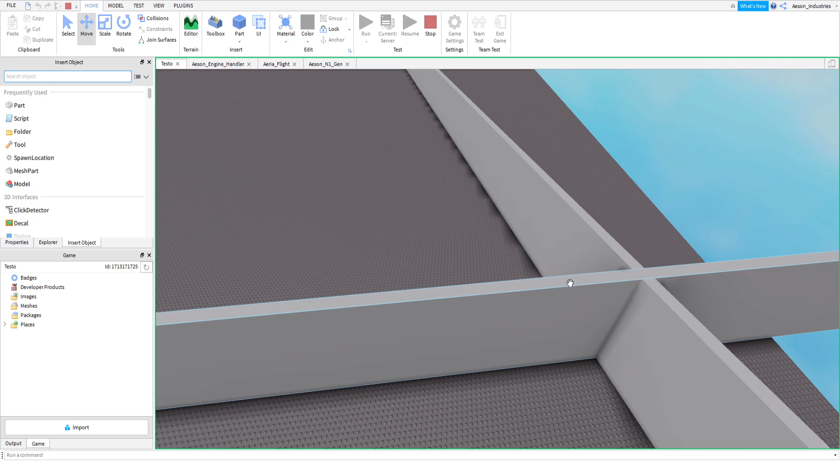Depending on the speed I'm going at, if I find out that it's easier for me to do the 777X before the A320, then I may just skip the A320 and come back to it afterwards. But the A321 will definitely come out first. Then, depending on how fast we've done the A321, I could even just have out the A320 as well. Then move straight to the 777.

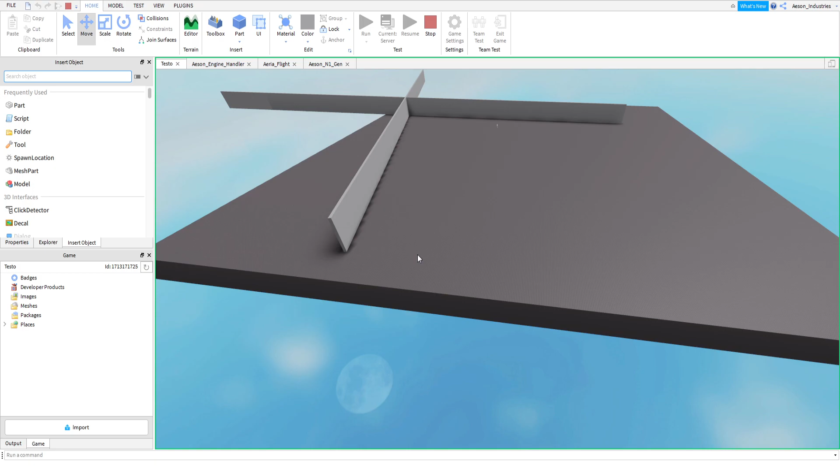And that's the 777 would just take maybe a small bit of time because it's a different system. Airbus systems, as I say, use fly-by-wire. The 777 does use fly-by-wire, but its fly-by-wire works, for me, kind of stupidly if I could say. It's a bit different, and what it does, instead of holding your flight path as I've demoed in multiple videos now, it instead holds speed.

So the last speed, I believe - I will need to still do my study and research on it, my homework on that - but what it does is it's a speed hold type of fly-by-wire. So the last speed you were doing before, like you moved the yoke, before you release the yoke - say if you were flying, moving the yoke up and down, and you release the yoke, just before you release it whatever speed that is, if it's 250 knots, I believe the plane will hold that speed. It will pitch the plane up automatically or pitch it down automatically just to maintain that speed.

Which means on the American plane, majority of the time, the only way to really gain altitude is to use the thrust levers. And I remember, their autopilot also has a completely different input, called FLCH or something, flight level change hold, which basically, because the flight is a speed hold fly-by-wire, it needs to both maintain the speed you set when climbing to another altitude, and also maintain that altitude at the same time.

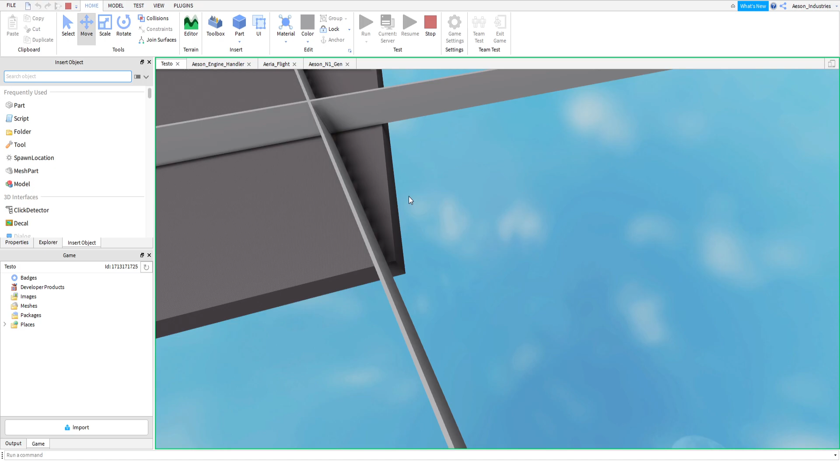When I move to Germany, there are possible job opportunities in different technology firms in the real world, as well as, if I take up this Airbus opportunity, that will mean less time anyway. So the future of Aeson is definitely bright, at least for aviation.

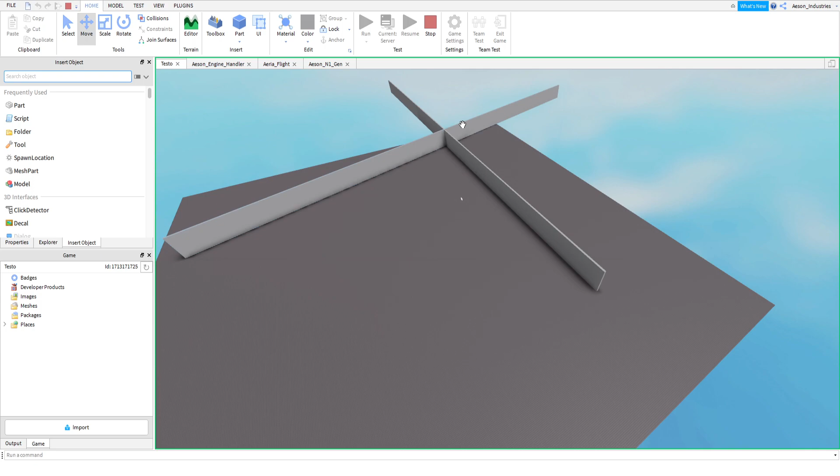We will definitely have a lot of great systems out by that time, so there's nothing to worry about. And then road trains, of course, for those train fans, there's a bright future there too. By the time Aeson basically closes, we would have accomplished all we set out to do, and even more. It'll be a great chapter to close.

Now, I don't believe the group will be removed when we end development, the Discord probably won't be removed, so there'll possibly still be support and stuff. But when Aeson does come to its end, it'll be a development end, that type of thing. That's not till, at least for now, a pretty long foreseeable future.

We can't wait to get to the stage where Roblox brings out grids, so we can have 8-hour flights - joke - but also brings more physics improvements, stuff not breaking, and better experiences for the community. As I say to those in the community, if you have a dream or a focus on something, don't worry about what's going on in the community.

There is, in every community, toxicness or whatever, but if you're focused and aiming to do something, you don't ever see that, or at least don't come across it commonly. Aeson has barely ever been in any toxic beef, at least any big beef. I barely even know what goes on with drama in the aviation community unless it ends up in the server because someone's talking about it, since I just don't bother.

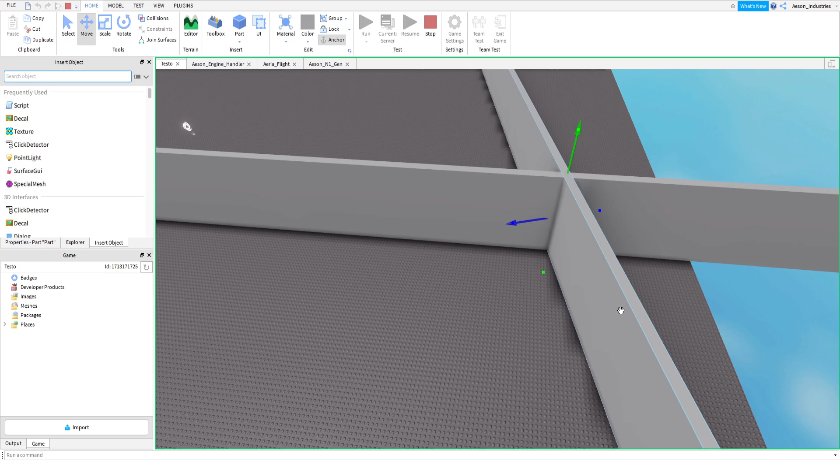I would say our community is not completely as bad as some people may see it. If you've ever been in Road Cars, Road Military, or Road Nations, I think you'd be completely shocked if you saw those.

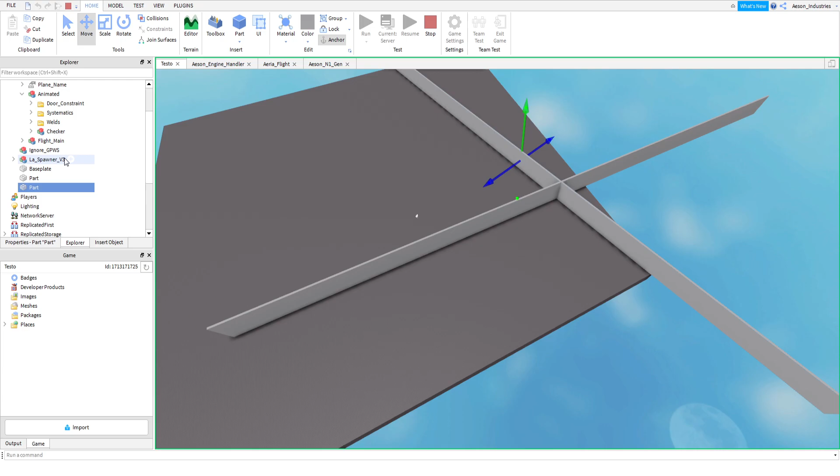But there's no need for anyone to be focusing on the negative side of things. It's not worth your energy, and if you feel that's what you're going to spend most of your time on in the community, it's probably best to just take a break from it.

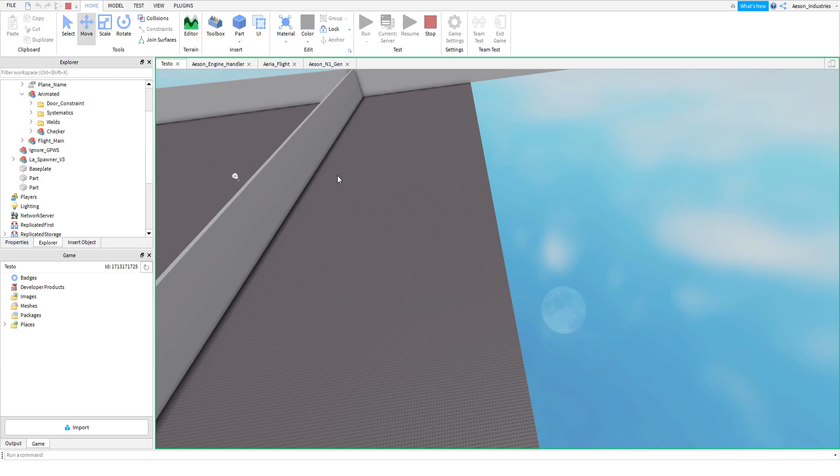Of course, I know there are people that do get this, maybe just because of people being jealous of them, etc. My aim is just put your head down and ignore those people.

Try and make sure that if they're exploiting your game or something, you don't have vulnerabilities in it. Most people do have vulnerabilities, as I say there was an exploit about throwing things about. Make sure stuff that isn't used is anchored or deleted - so cars, if they're not being used by someone inside them that's frozen, delete that car.

Make sure all your cars, planes, or systems, if there's no owner in it, set the owner to the network owner to server. No one can exploit that thing once it's done like that.

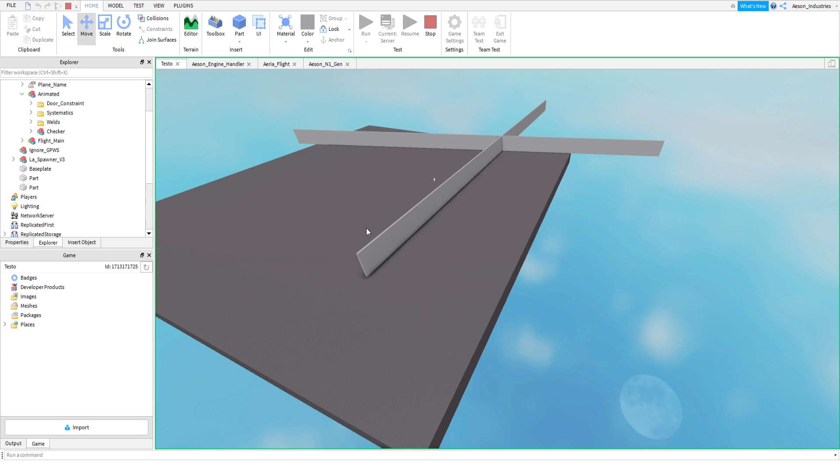If you have an Aeson jetway, use its function of freezing itself by making sure that if you start the game for the first time, jump into the jetway to turn it on, then jump out of the jetway if you're not using it, and it will freeze itself. No one can fling a jetway. I haven't seen jetways being flung after people realize this.

Whatever is unanchored in your place is a risk of exploiters using the network ownership radius exploit and throwing things about. So try and avoid that.

The one thing I would ask the community is just not to be lazy too much. Try to value the developers in your community. Growth doesn't come from being lazy or undervaluing your developers. Working together is very important.

It wasn't long ago until we started using mesh planes. The community's been here maybe 9-10 years. I remember when I joined in 2013, we had row air and stuff, and that was when CM32 kit was just pretty new, and we've been using that ever since, even though there's been new technology until recent.

So now trying to bring in my new kit, it's more of a challenge that will easily become mainstream by next year at the latest. There'll be more Aeson kit types in the community, by other people probably, or if not, my Aeson kits should be around more pilots.

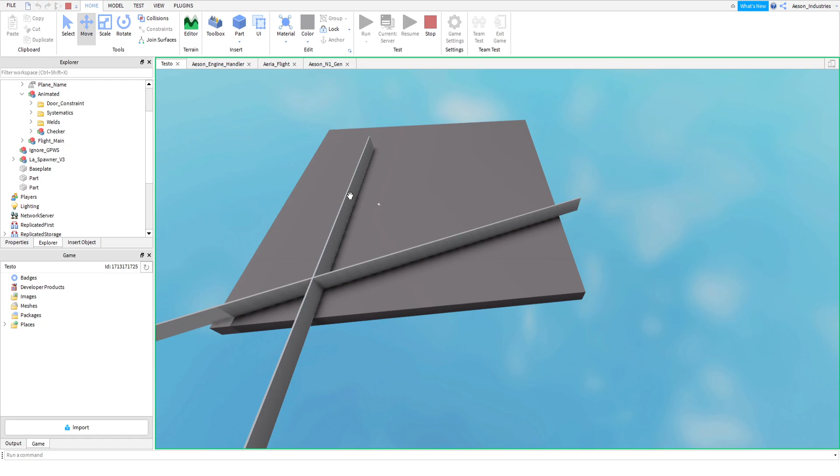When I started Aeson, there wasn't really any mesh planes being flown by anyone, so it was a big gamble on how to get this to be mainstream. There was a bigger group at the time who were also looking to bring mesh, and they'd been there for quite a while, but they didn't do as much at the time.

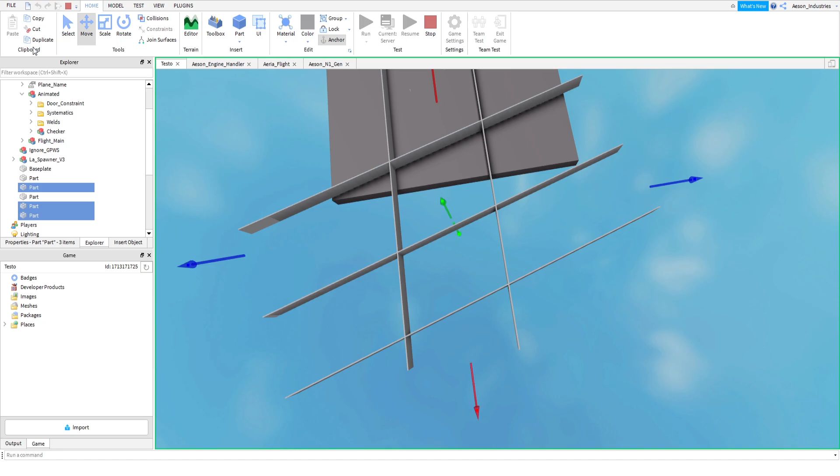So I decided to start off with a plane that wasn't commonly used, because the A350 at the time wasn't a commonly used plane. In fact, I don't think I ever saw an A350 on anyone's airline at that time. The first airline I flew with after coming back to aviation was Air Britain, but they were using mainly 767 and A320, so I didn't really see that there.

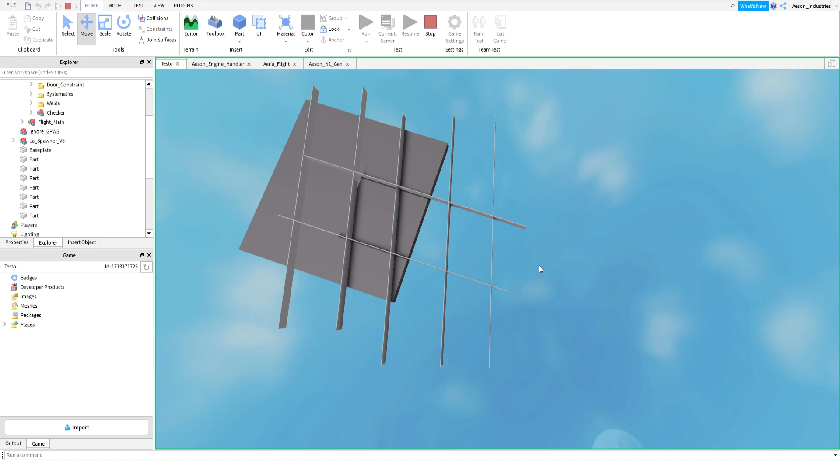So I decided I'm gonna start with the A350. Not only is it my favorite plane, but it'd be nice to have it in Roblox. And it went off with a decent bang, and then we moved on with that.

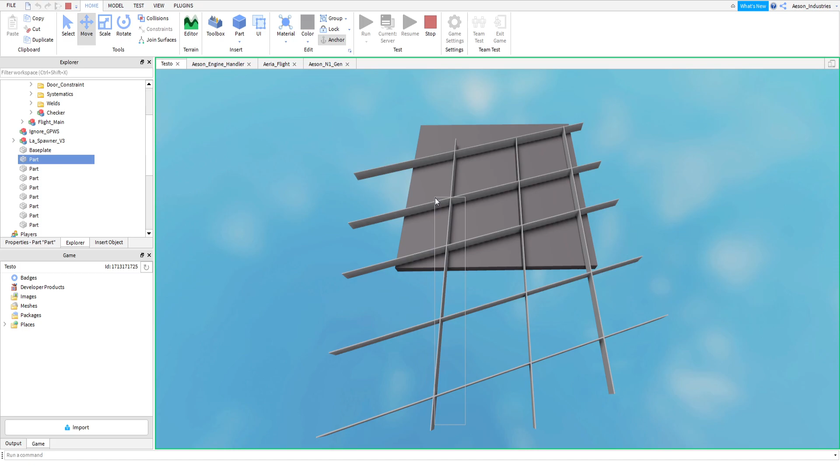I decided not only to make it a nice mesh, but to bring some systems I hadn't seen people do but should have been done - suspension, the first fully working suspension, some nice sounds. At the time I don't think there was a kit with adjustable flare. I may be wrong, but when V1 came out I wasn't aware of one.

This was around 2018, around September. If you knew of one at that time, let me know in the comments. But yeah, there wasn't one at the time I knew of, so we added that, and it did really good wonders.

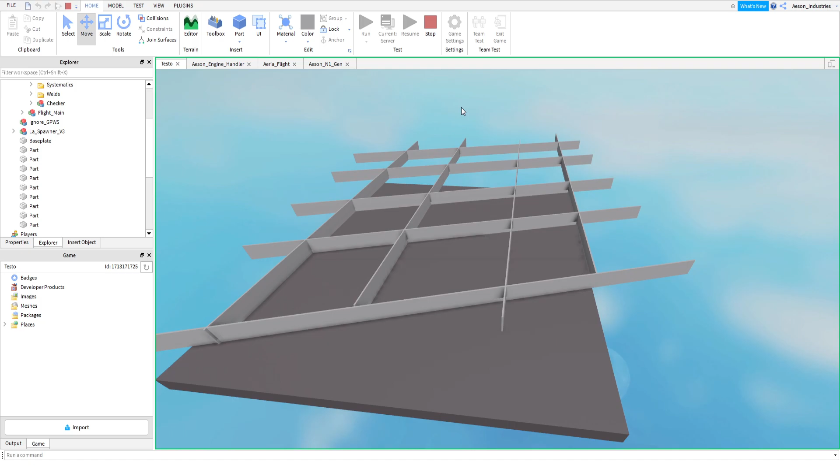The airline that really showed off the A350, for example, was Fly Swiss, and also Skyfly were flying it. We had Aeria also flying about the plane.

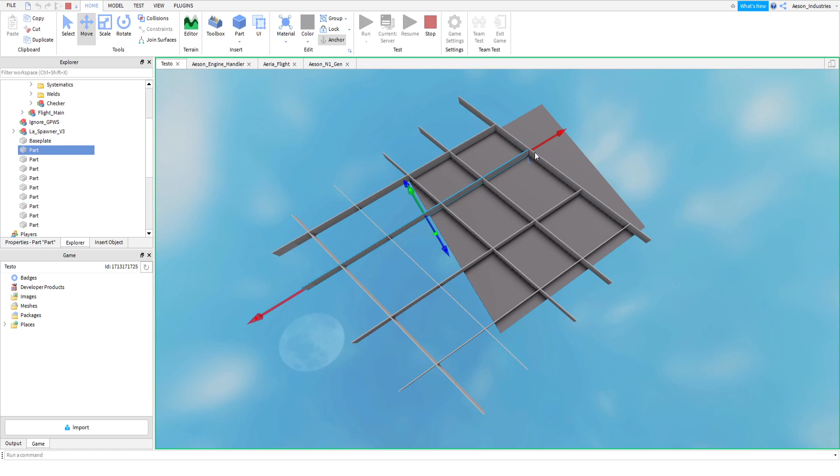More and more people were coming out with planes, and so we look to a new 2020 where quite a few airlines now are just readying up themselves to start flying the A350 again, with Air Monaco looking at starting their A350s again. Aeria is just waiting on their interior for their new planes.

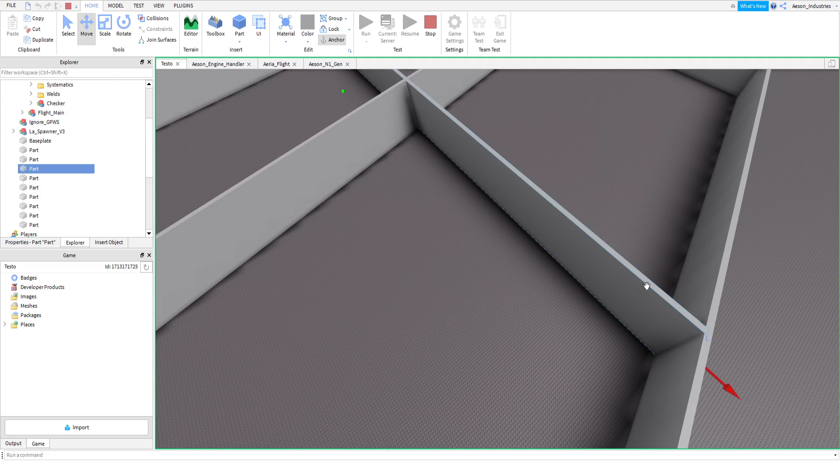We have, I think Spectre was talking about the A350. Fly Swiss is looking at a new interior for their A350 at the moment. Quite a few airlines are looking for new interiors, so I can't wait to fly with those.

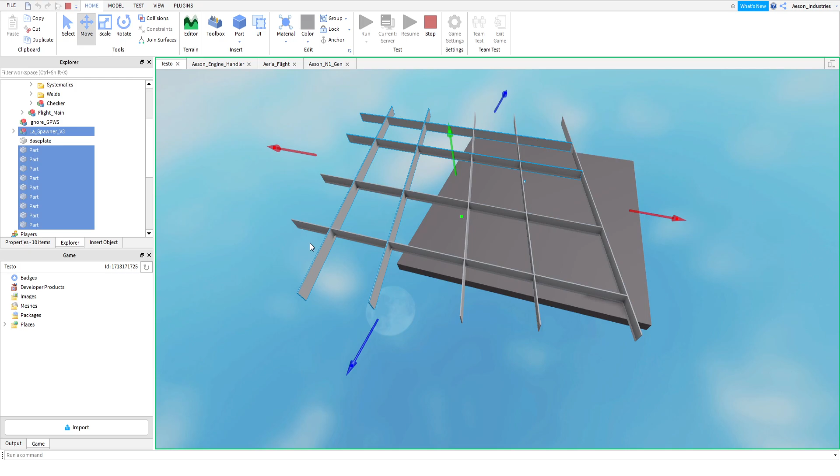It's always nice, as I say, the money's not much, it's not the focus. It's really to just see if you've had an impact on the community, however small, and if it's inspired people to get out of their comfort zone and try something new. If you've done that, you're doing something right. If not, you've got a lot of work to do, I guess. But yeah, the aim is, as I say, and I've kind of done this without my

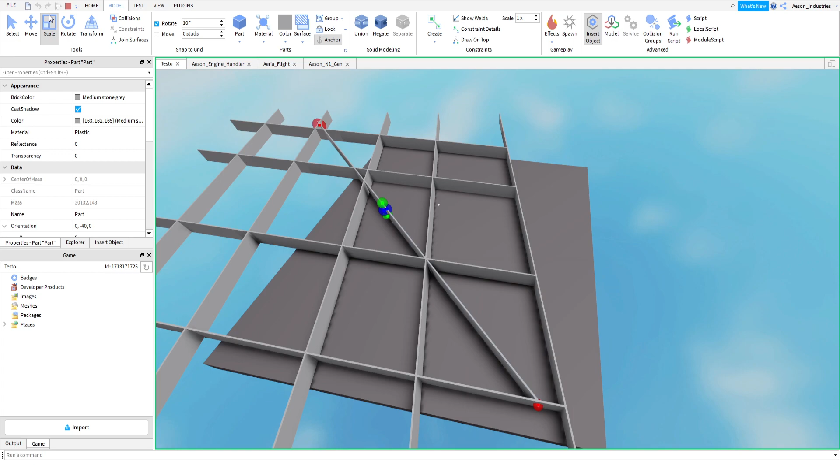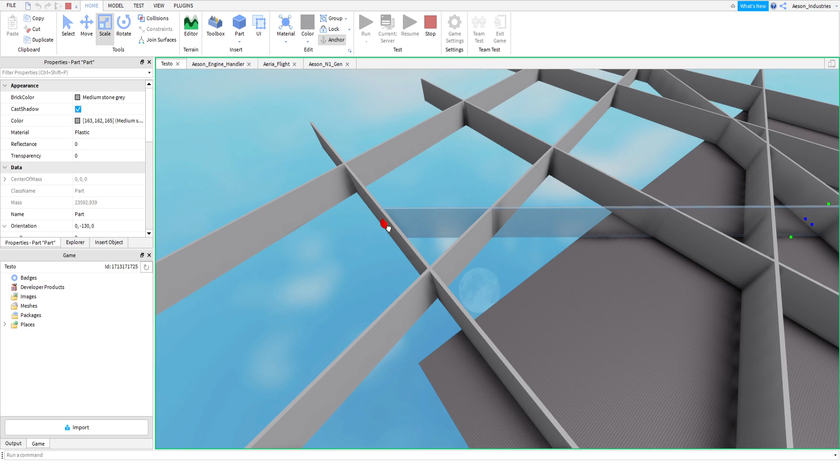I would definitely love to have more developers working on the Aeson stuff. Yeah, for sure, it would probably make things faster. But on the flip side, all the systems I do just come out of, like, literally once I finish a day, I go to bed, and...

If I'm trying to think of something new I want to do, like when I was thinking about this kit, it all came really from a dream. I'd just be thinking, oh, this is what I do, and I can see the code in my head and see the method to do it.

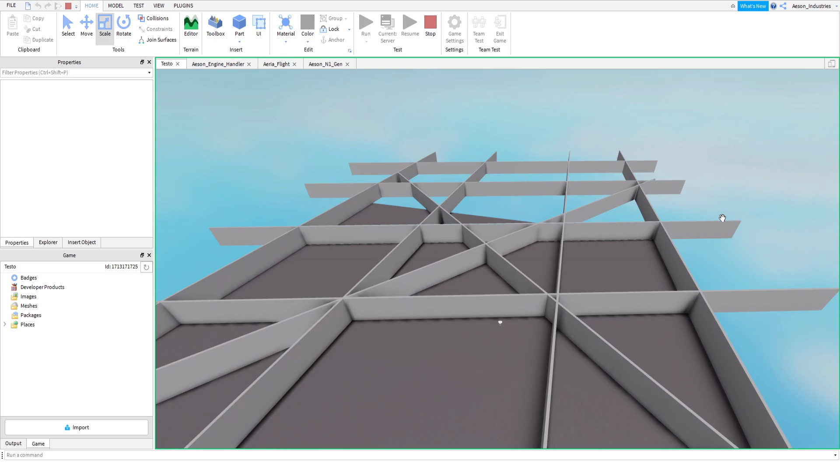If I have a problem I can't find a solution for, like the previous issue with the A350 where we couldn't land properly because it was Dutch rolling, the solution I found was pretty much in my head: you need some type of system that will keep the plane's rudder correct during any differential movement, because the ailerons create their own adverse yaw from how they move, so you need to counter this.

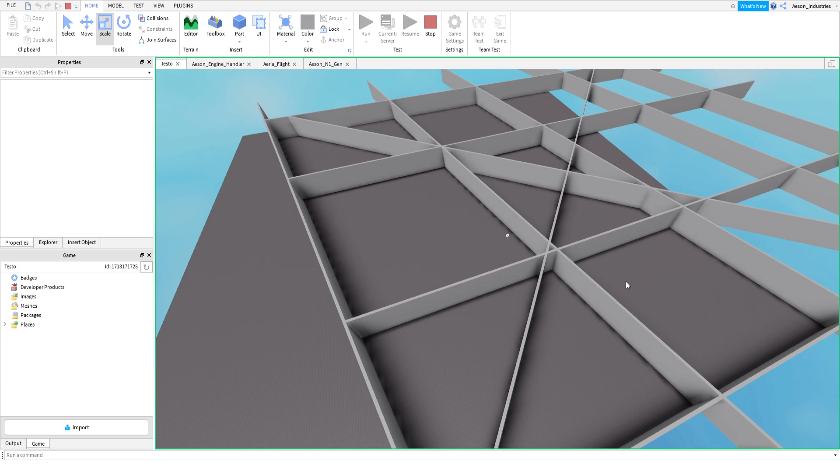I looked online for what that is, saw a yaw damper system is what's used on all planes, and I'm like, oh okay. Coded that up quickly because it's just PID, very easy for me to know what to do there, and boom, fixed the thing. I see all my students now having no problem landing, at least following the center line.

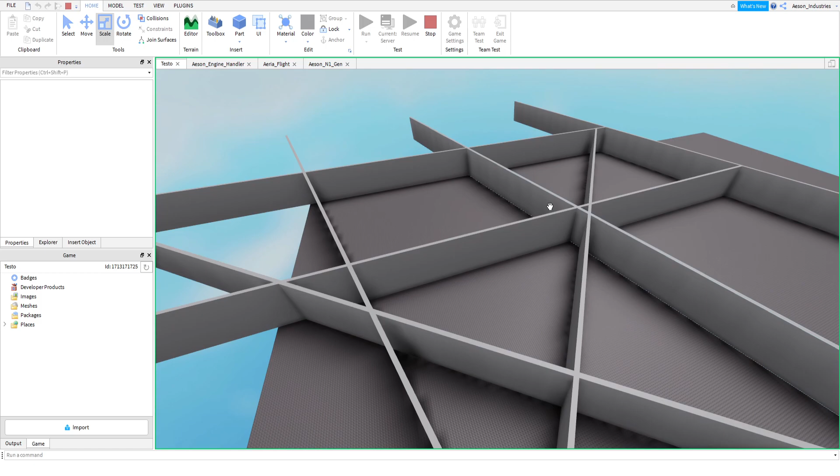We'll talk about landing in a different story, but yeah, much better than before. The others are like, damn, this is a lot more stable now, because if you've flown the previous versions before these updates, you'd probably be like, how does anyone fly this? Funny enough, the V2 planes were actually being flown for a brief while by a few airlines, Fly Checkways, Fly Aeson, and I'm surprised how they were flying.

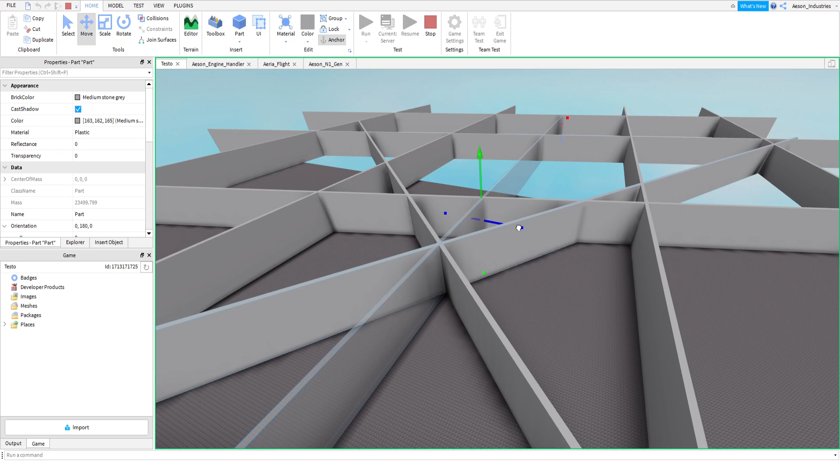I think, to be honest, they were flying the V2 version before we actually had functioning surfaces, and that one was a lot more stable than when we first put the functioning surfaces in. I didn't realize the functioning surfaces would actually create adverse yaw.

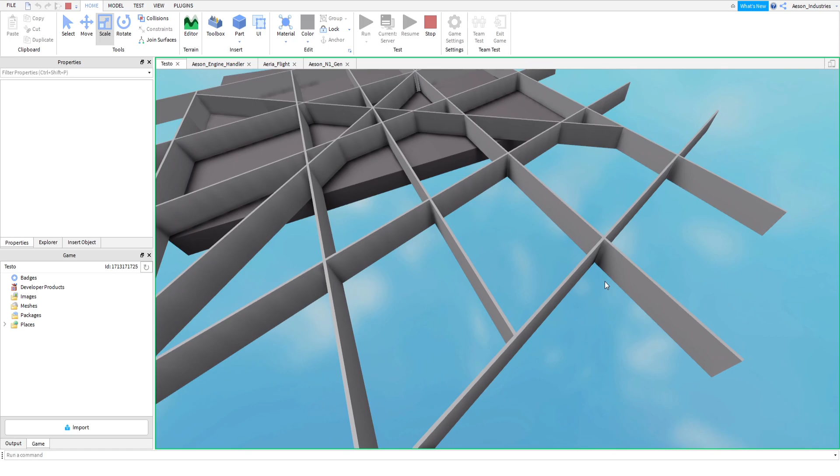For a while, people were finding landing near impossible, and I was like, you guys don't know how to land. I tried landing myself and was like, oh no, okay, it's a lot harder now to keep the center line without using the rudder.

So now the current version is very easy - once you learn how to turn on the plane and how the different functions work, you can get that plane in the air and get landings done once you master flare mode, which is very easy. There are multiple real-world tutorials you can follow that translate very easily onto the Aeson plane, because this is a very realistic plane in its adaptation of Airbus's fly-by-wire system.

I'm gonna even say it's more realistic than Microsoft 2020's A320neo, which I don't think even has fly-by-wire, and possibly some X-Plane adaptations as well.

But anyway, that's about it for this video. This video was mainly supposed to be showing you the A380 suspension change, and of course all 4 engines are now on, so it's not long until you'll be seeing a video of the A380 actually moving under power. And now it's gone into probably like a question and talk about Aeson's history.